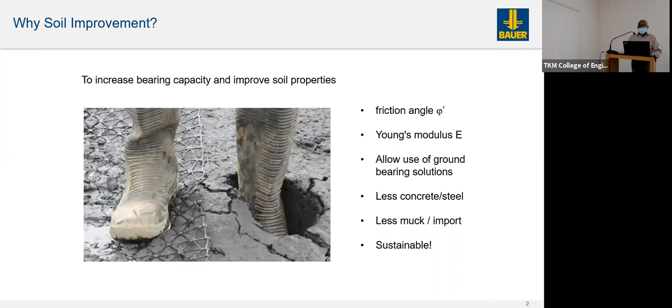Often we ignore these things while we design our structures, basically due to cost constraints. But at the end of the day, if you try to save pennies when you do a proper design, you will spend a lot of money at the end. This is what we see in a lot of projects around the globe. I have traveled in excess of 50 countries and done seminars in many places. We might think it is improved in certain parts of the world, but in most places, at the end of the day, everybody goes behind the penny, the money, which in turn increases the cost at the end of the day.

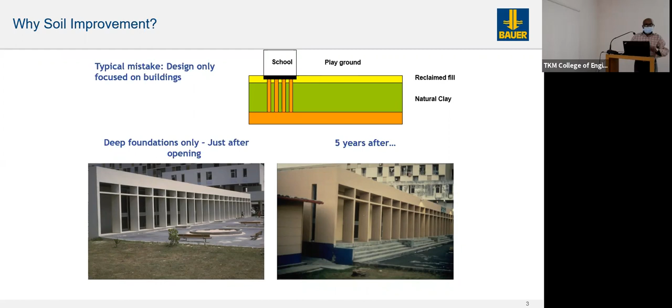I have one question. I hope everybody understands English here, and if I include Malayalam in between, you have no issues, right? I hope it is good.

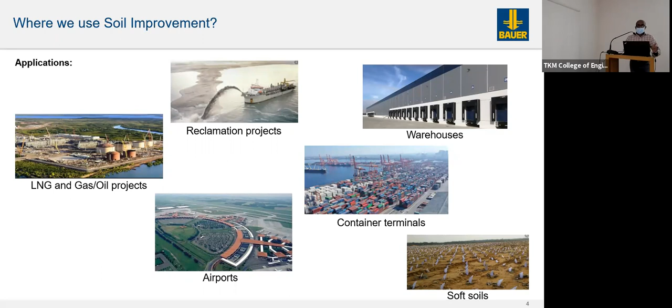Where do we use soil improvement? Basically, soil improvement is done for shallow structures, like oil and gas projects where you don't have multi-story buildings, reclamation projects where you definitely need consolidation, compaction, and improvement, warehouses which are not multi-story buildings so the bearing capacity requirement is lower than high-rise structures, container terminals where containers are put on grounds where the soil might be weak, and airports - in Dubai, Abu Dhabi Airport, I'll come to that at a later stage. Then general improvement structures, where you might not need anything specific, but you need to improve the soil because of settlement and bulkage.

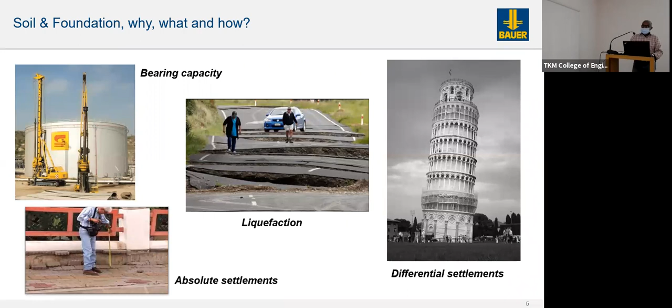On the right side, this is the famous Pisa Tower. You can see the differential settlement. I've been to this place and seen it looks exactly like this. When you're there, you're always scared to go near the building, although people go very near and inside it - it's because of the differential settlements. This has to be identified, analyzed, and designed prior to execution of a structure.

When you look into ground improvement, piling could always be a ground improvement activity. Piling also improves ground to take the bearing capacity of the loads, but that is not good enough.

Look into that left-below picture, you can see a building. The piling is perfect, but the soil was not improved, and because of negative skin friction, some portion of the pile settled, causing an overturning moment and structure failure. The right side picture also explains the negative skin friction due to no soil improvement. So piling is not always enough.

This can be mitigated another way, by increasing the load bearing capacity of the pile, considering the skin friction as well, negative skin friction as well.

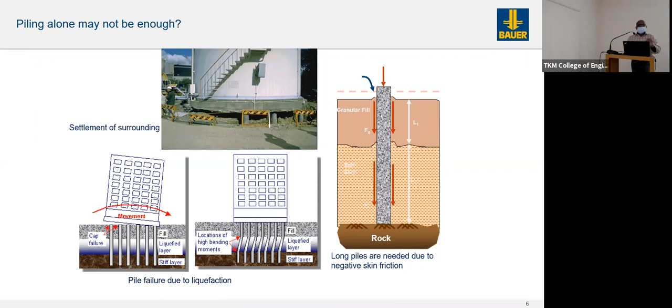Let us talk about the methods of improvement. Basically there are three methods, it all depends on the soil. Soil improvement is basically either consolidation, compaction, or reinforcement of the soil. At the end of the day, all three techniques increase the Young's modulus, the stiffness, and the angle of internal friction of the soil.

So let us look into the consolidation. I will go into detail on these techniques in later slides, but let us first look into the summary of consolidation. I believe the S7 and S8 students at least know what consolidation is.

And are there any first years here? Any S7, S8 students?

Okay, consolidation could be by itself, by self weight, or surcharge, or induced consolidation. Basically the soil by its own weight settles down, that's called consolidation. You can put surcharge and give artificial consolidation, or it can be natural as well.

Then compaction. Compaction can be either surface compaction or deep compaction. I will go into detail in my later slides. Basically all these things are based on the type of soil we are dealing with. Compaction is done using rollers, vibrators, hammers, depending on the type of compaction chosen based on the soil.

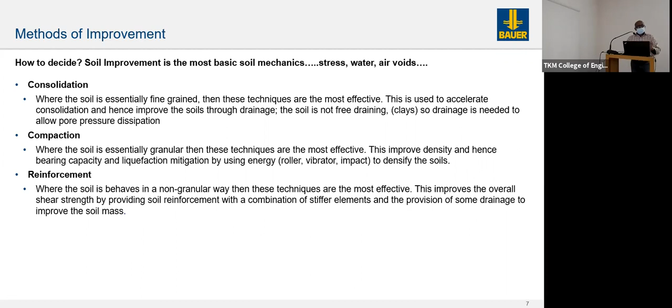There are various techniques. In today's presentation I'm not going to present all the techniques because it's endless. Even in our company we improvise with techniques sometimes, we do combinations. So let us look at the methods of improvement - basically we are going to talk today about consolidation, compaction, and reinforcement.

Okay, let's see the details of these three methods. Consolidation.

We know what a vertical drain is. Basically, stress has to be relieved from inside the structure, inside the soil, deep, either through surcharge or through self-consolidation.

PVD is called prefabricated vertical drains. You draw pipes into the soil, which creates pores and allows pore water to escape through the pores. Vacuum consolidation basically puts pressure and consolidates. Then you have a mixture of stone columns and PVDs, a mixture of many things. I've put only minimum things here.

This is consolidation. Normally in our construction, what I've seen over the past 30 years, when you backfill, we always make the backfill stay there for a couple of months - 3, 4, 6 months - so that it self-consolidates. Even in building constructions, when we do basements and backfill inside, we sometimes pour water and keep it for some time for self-consolidation. Basically this is the principle for self-consolidation.

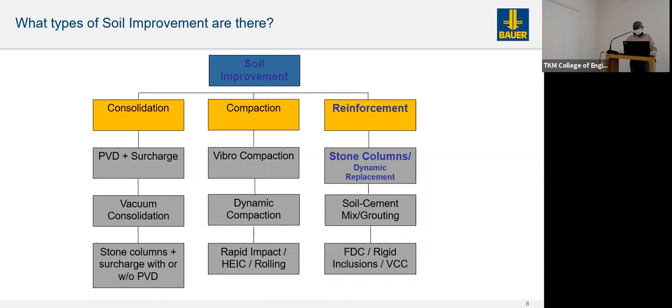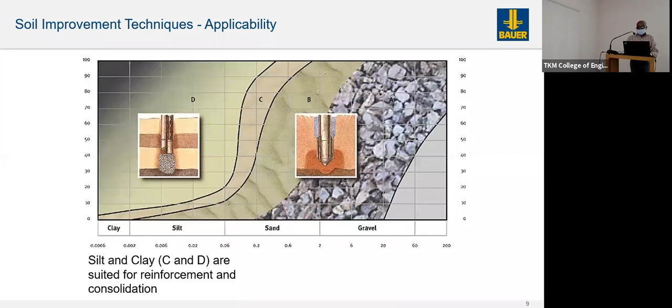Again, same thing - from right to left, the cost increases. When you look into the percentage of passing of the fines, on the right side, the percentage of fines is less. On the left side, the percentage of fines is more.

This is a bit design side, I don't want to go too much into it. It's just that zone A and zone B can be used for surface and vibro compaction. Zone C and zone D, you can go for reinforcement - basically replacing the soil or compacting with a higher stiff material.

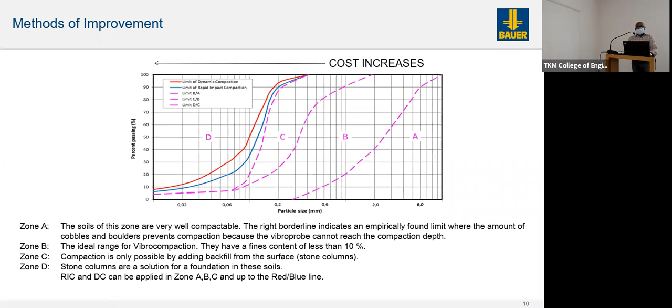Okay, when you want to do a soil improvement, first of all, you need to decide what performances are required. You have a performance specification. Any building, any design, you have a performance.

When you design a structure, you design a beam, you always find out how much is the load to be distributed on the beam, then to the column, and then down, and then to the foundation. Like that, you always look at the performance requirements.

At the end of the day, as I mentioned before, you increase the stiffness of the material. Well, how do you increase the stiffness of the material? By increasing the angle of internal friction.

So first of all, you have to find out the bearing capacity and enhance it to the required one. You find out how much is the bearing capacity of a soil at the moment and how much you have to improve based on the loads coming from the structure.

Then you have to limit the settlement. Sometimes certain soils are good enough to carry the loads coming in, but it might induce settlement on a long-term basis. In that way, you do a settlement analysis and find out what is the capacity of the current soil for taking the load and giving a settlement in the next 25 years. So you can do a 25-year analysis using different techniques in the design.

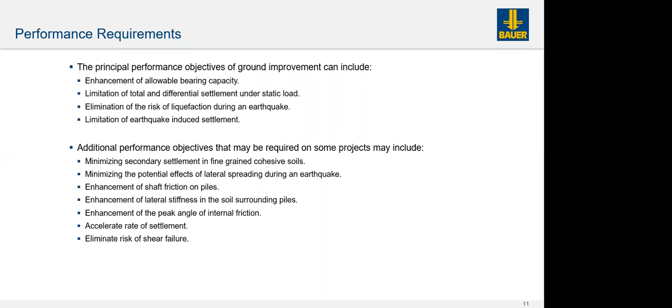So mitigating and eliminating the liquefaction potential during an earthquake is the most important thing when we design soil improvement in earthquake-prone areas. But that's not the only thing. You can consider the liquefaction potential, but you also have to limit the settlement due to earthquake. So considering all these things, you need to improve the soil.

There are additional performance requirements for certain areas of a structure - at certain corners, the load might be a bit more, so you need to improve the soil bearing capacity there.

A typical structural engineering example: you have to improve the soil in reclaimed areas, like Palm Island in Dubai - you must know Palm Island. That's a completely new island, all reclaimed. All the structures are on piles, but before piling, they performed soil improvement, only to reduce the negative skin friction of the soil.

When we looked into the analysis, we found that if you add these loads to the piles, the cost of the piles would be much more than the money spent on soil improvement. So we better do the soil improvement, which is good for the whole structure and the surroundings.

We did a complete sweep - we swept along and did the soil improvement, and then did the piles for the required areas.

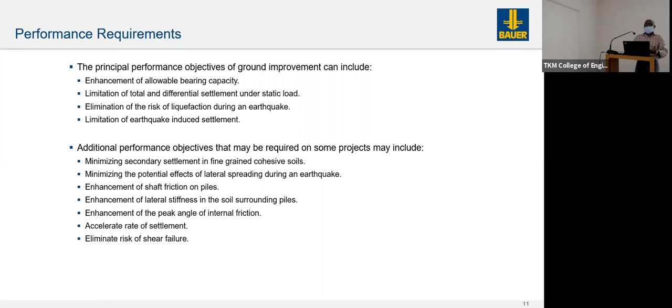Elimination of risk of shear failure - ultimately, when you improve the stiffness of the soil, the shear failure is reduced. Now, consolidation techniques. Let me go back to the slide where I mentioned the 3 important facts of soil improvement: consolidation, compaction, and reinforcement.

Let's come to the consolidation techniques. Vertical drains - I believe you know vertical drains. These are basically drain pipes pushed or drilled and installed through the soil. These pipes have slotted holes which go down and take the water or air out, because in clay structures, you know, the drainage is very little. So basically they're making a drainage layer, with intermediate layers.

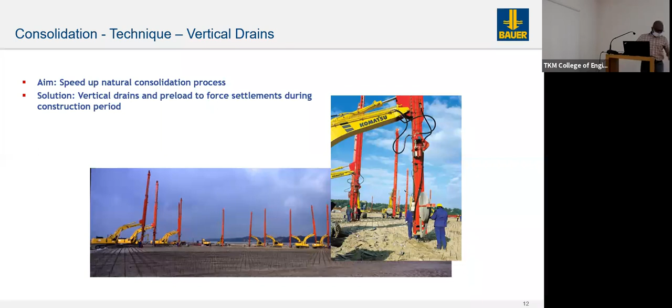If you look at the structure here, you can see the bottom layer, with a compressible layer on top which is soft, and it is drilled through, allowing the stress to reduce by taking the water or air out. That's where, when you go for natural consolidation, this comes automatically over a period of time.

Whereas these are induced vertical drains, which are very familiar in places like Jordan, Lebanon, and Iraq. Iraq is a place where vertical drains are very much required because they have a clay layer on top which disallows the water and air from coming out. So the moment you drill, you will see air and water coming out like aquifers.

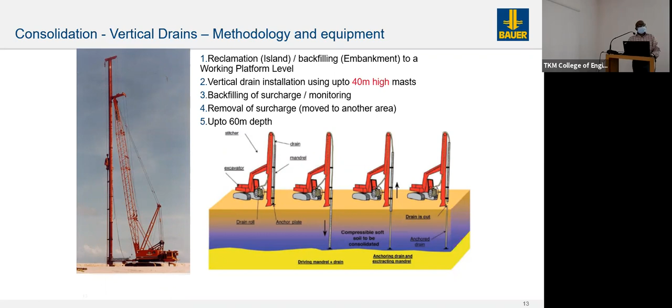I've been to Iraq and seen when they drill, the machines go down, even before giving the vertical drains. These are all prefabricated verticals. We have done up to 60 meters, we have drilled up to 60 meters and installed these drains.

This is basically the principle of this. You have a compressible layer, a compactable layer down below, basically take the drain pipes down and then release the pressure either naturally or put the surcharge. You put the pipes and fill the surcharge with this load. You basically drain the soil out, drain the water and the pressure out.

Install vertical drains, apply surcharge, allow consolidation time, remove surcharge and put the surcharge to the new place, and the method is repeated.

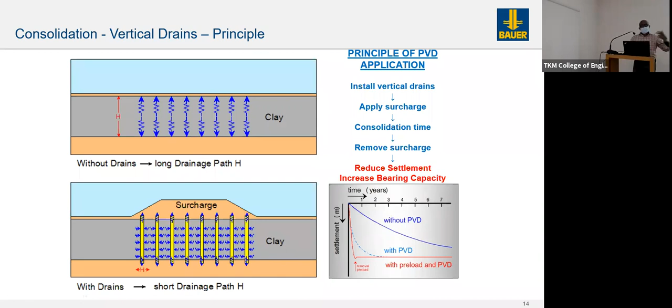The second technique then, we go for compaction. Compaction is classified into 2 types, basically surface compaction and deep compaction. For surface compaction, you have different techniques. The easiest way is the rollers, which I'm not going to talk too much about.

This is called high energy impact compaction. These are rollers. From the shape itself, you know how it is going to work. I will show a couple of videos which shows these things. Basically these are triangular, 3-sided rollers, which is being rolled, and then compaction is done automatically by driving around with this tractor.

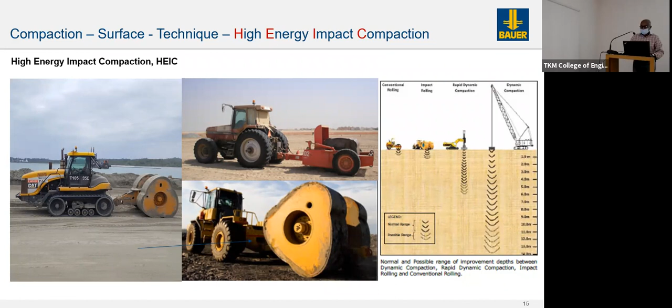This can compact up to 2.5, maximum 3 meters. These are the equipment which we fabricate, which we produce. This is where it is, you can see it. There are 3-sided and 5-sided types. The 3-sided are more powerful. You can see 25 kilojoules and 15 kilojoules. It depends on the type of soil. If you ask me which one to choose, it all depends on the type of soil.

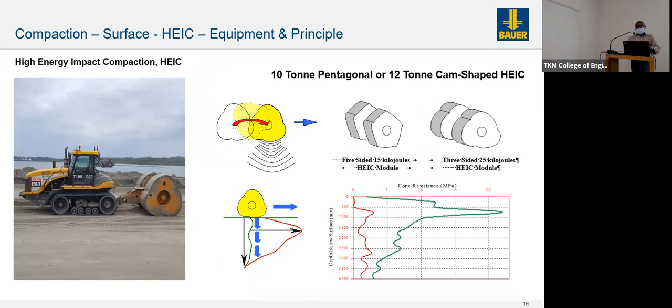Basically, they're going to impact, and the pressure is being transferred down, and over a period of many passes, many rolls, the bearing capacity is going to be increased, and you will see settlement as well. I'll show a short video of this HEIC.

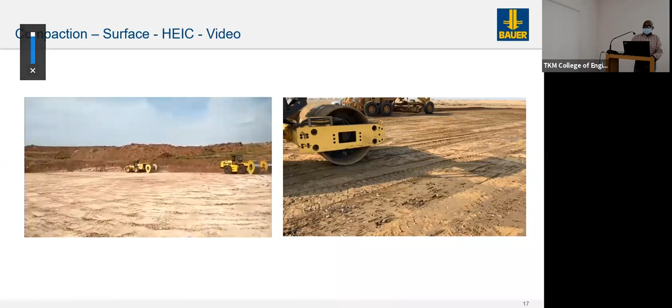Basically, it's been driven like this. So you actually design these things based on the soil, based on the contours, based on these rollers, they find out what is the thickness of the layer to be improved. Based on that, they will always design the type of pounder, the speed at which it can roll, and the number of passes.

These are all designed, it's not that you drive haphazardly. You have a series of tests to be done before and after. You do a pre-CPT before and a post-CPT cone penetration test. So this is being designed and done, this is the way it's done.

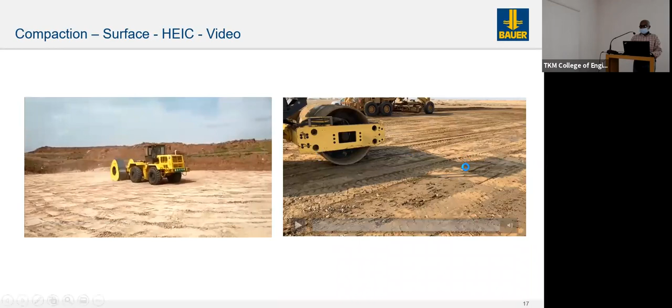After that, what they do is they do the roller on top. This is the roller compaction for the first 50 centimeters top layers. This is basically high energy impact compaction, the shallowest compaction in ground improvement, apart from the roller side. The roller is there for every type of compaction, at the end of the treatment, whatever you do, a roller compaction.

Now, the next method is called rapid impact compaction. This is basically using dynamic loads, dropping hammers fixed on a machine. These are the machines produced by us. You have different types of machines and different types of hammers as well. The middle sketch is very clear how the energy is being transferred down.

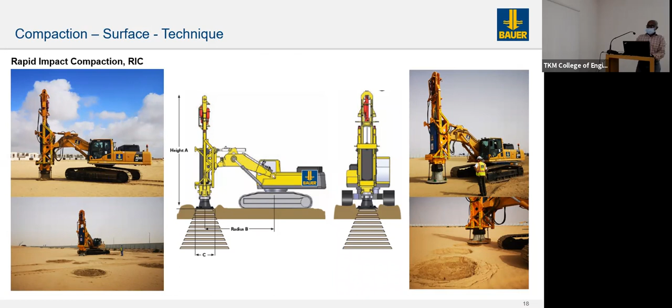So you do a series of hammering here, and you overlap based on the design. Again, it depends on what type of soil you're treating, what type of method, what type of equipment you're using, and what thickness you're treating. Just to show videos on this one, these are all amateur videos taken from outside, okay?

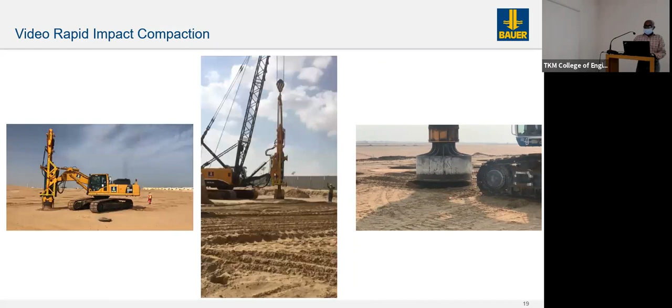Basically, what we do is drop this hammer based on the design. The number of blows has been designed, the type of hammers are designed, and we can compact up to 4 to 5 meters on normal soil. This is basically rapid impact compaction. The next one, dynamic compaction, is a bit deeper. This can go up to 9 or 10 meters; we normally do it from 5 to 10 meters.

Again, basically this is nothing but dropping of hammers. You have a crane, it's fixed to a hammer through this wire rope, and then it is being dropped.

This is an example. I switched off the audio, okay? So this is dynamic compaction, where we use the hammers.

This is also a hammer, a bigger hammer as you can see. You lift it. This height of lift is also being designed. It's free fall.

This is a hammer being designed in a different way. This is a 25-ton hammer, the weight of the hammer is 25 tons. This is something exclusively designed for a particular project, and we have designed it differently. You can see when it falls, it's different.

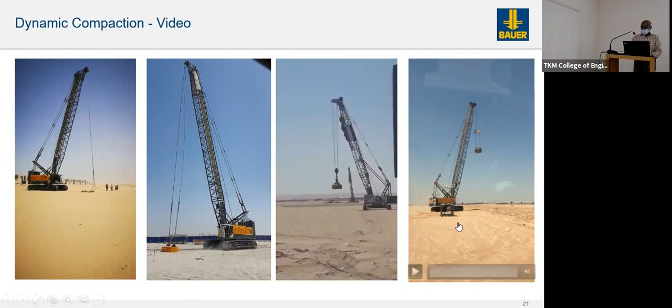So you will see a lot of craters like this, a series of craters which have to be backfilled and compacted.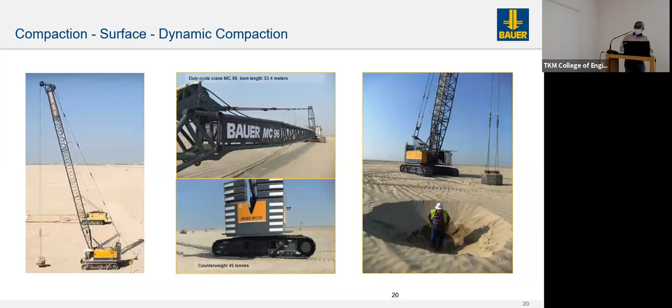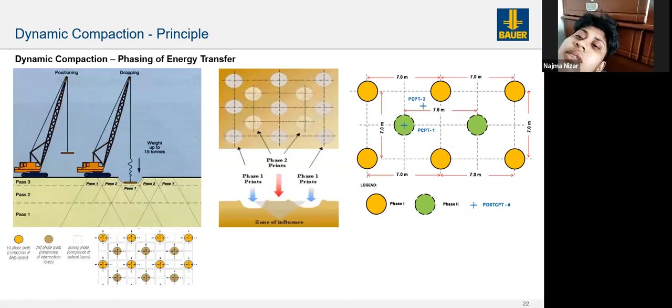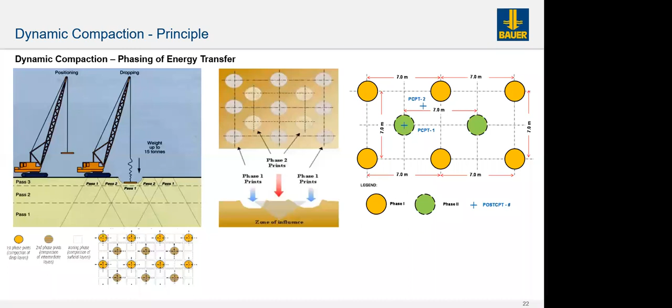The principle of dynamic compaction, you can see it from the sketch. It's being compacted in phases. Phase one, you compact with a huge hammer which will reach up.

Okay, you do a pass one with a huge hammer, and then as you go up, you reduce the size of the hammer, all based on design. Sometimes we might use the same hammer with a limited number of passes and reduced drop height. But when we go for big hammers, you need a bigger crane, and the cost is very high.

So what we always do is, when we do the first pass, we move to the next location, and a smaller machine comes in to do the other one. Or we bring the RIC machine to do the top 5 meters. So you will see overlaps here so that the whole area is compacted.

This is the way it's done. That's the second pass and third pass, and pass 3 is the surface compaction. That's surface compaction.

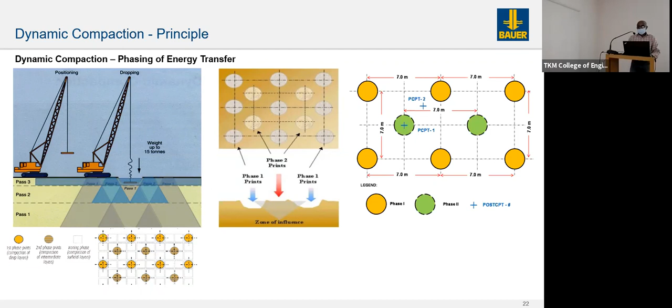Now, deep compaction. What we've spoken about now is compaction from the ground surface. Now we go to deep compaction. Let me go back again: you have surface compaction, which can be done using high energy compaction, rapid impact compaction, and dynamic compaction. High energy compaction can be done up to 2.5 to 3 meters, rapid impact compaction up to 4 to 5 meters, and dynamic compaction up to 9-10 meters. Beyond that, the energy from dropping a hammer will not be transferred further.

So what we do is go for deep compaction. Deep compaction is done using vibratory techniques. You have a vibrator which is poked into the ground and vibrates it, so it horizontally displaces the soil, and when it compacts horizontally, the ground comes down.

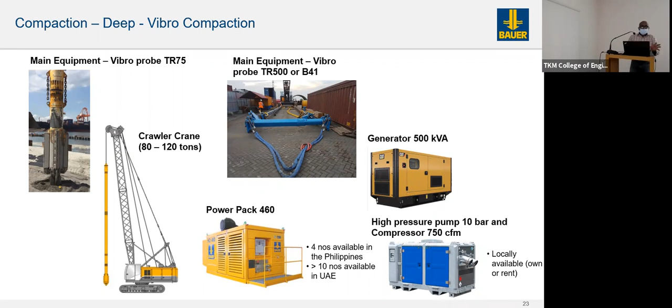The equipment used includes vibrators, cranes, then the power pack which vibrates it, generators of different types, and also pumps. What we normally do in vibro compaction is mix air and water through the nozzles of this vibrator so that it vibrates, without choking of the moving parts. Basically, this is deep compaction.

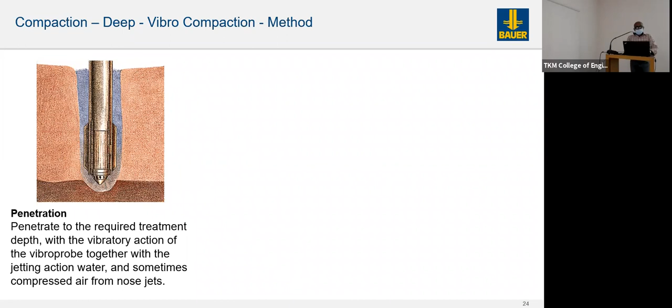The vibrator is this machine which is being driven down for penetration. It penetrates to the required depth. Then basically we install it, which means we hold it, penetrate to the maximum depth, and hold it at different steps so that the soil around is compacted.

As you compact down, you will see the ground settling. You can see even the crane used for compaction settle down sometimes 10, 15 centimeters at each location. At the end of the day, when you finish an area compacted about 15-20 meters, you normally get about 10% settlement. If you compact 20 meters, you might see 2 meters.

So for doing this, if you want a final grade level, let's say this is 0.00, you fill based on the compaction requirements - you do extra fill so that when you compact, you reach that level. This is the installation, and then this is completion of it.

You lift the compactor, it lifts the vibrator at different levels, stay there, retain it there for some time with vibration. These are all based on designs, because the design report clearly tells you how many times you have to stop in between and at what levels you have to stop. That's based on the type of soil you interfere with.

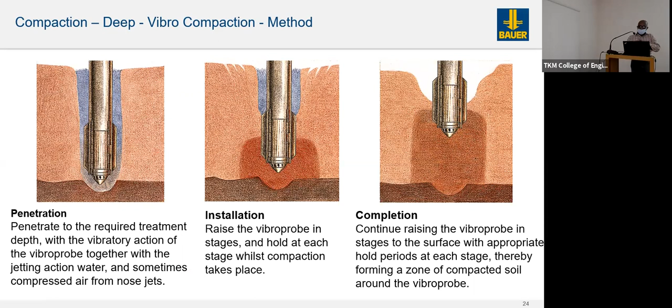Although we have all other equipment to do the works, because that might be part of this project, sometimes we do this together as well.

Okay, reinforcement. When we talk about reinforcement, it can be anything - whatever you do on the soil, it can be reinforcement. In olden days, when we backfill our basement, we use hand equipment to compact. So basically, you bring in good material to mix with the bad material and make it a better material. At the end of the day, you're increasing the stiffness modulus by increasing the Young's modulus and the angle of internal friction. Everything is E and phi, nothing else. In soil improvement, it's only E and phi dash.

The equipment used is more or less the same as that used for deep compaction. Basically you're poking it down, and those holes, when you do vibro compaction, you're not filling it. Whereas in this one, we fill it with inclusions - either cement, concrete, sand, whatever it is.

There is one more method not specified here in reinforcement, called dynamic replacement. Dynamic replacement - I explained about dynamic compaction dropping hammers. So what we normally do is, if you have 9 drops to be done, after the 5 drops we'll be filling rock into this. So we push the rock into the sand - it's a combination of stone column, a little bit cheaper. We do many methods in between - there are many combinations of these things.

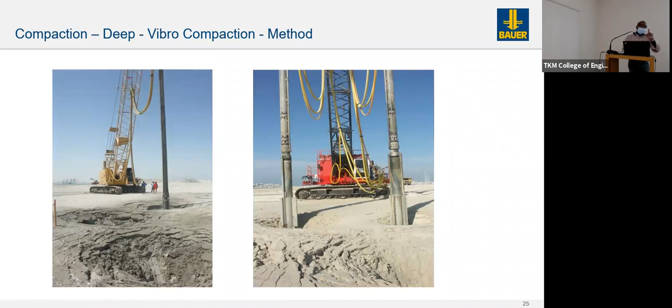There are 2 types of stone columns. Let us talk about stone columns. Using this equipment, you put the vibrator down and then fill with rock. Same equipment, but the rock can be filled in different ways.

The first one is called dry bottom feed. In some places, some clients, especially underwater, you don't want to put the rock onto the seabed. When we go to the seabed, you have to improve it - how do you improve the seabed? You pull the poker down. If you put the rock from a barge, it will spread, and you're not sure all the rock is going into the holes.

So what we've done is something called dry bottom feed. Bottom feed means there's a tube going through the center of the vibrohammer. We feed rock from top, it goes down, the valve is closed as you go down. Once it reaches the required depth, we fill rock through the hoppers, it goes down through the stem of the auger, the valve opens, and slowly we pull the vibrohammer up.

The normal method is wet top feed. This is going to be used in very wet areas as top feed. You put the vibrohammer down and feed with wheel loaders or shovels, putting rock inside to go into the craters.

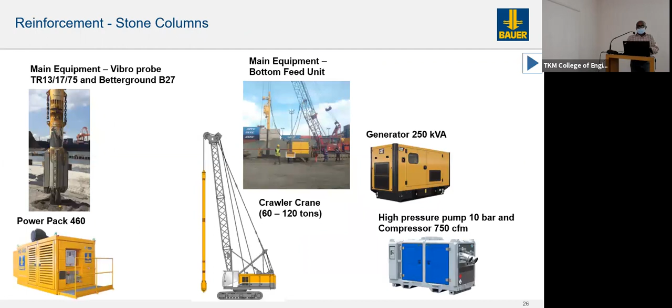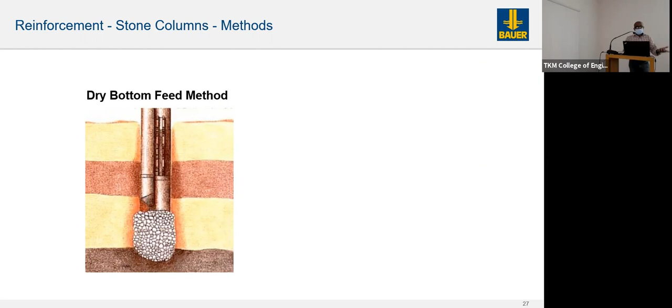So when you talk about stone columns using vibrohammer, dry bottom feed is predominantly used in underwater structures. In some areas we don't want to disturb the topsoil, so they do dry bottom, but this has limitations in depth, because if it goes beyond 10-12 meters, you have an issue with the equipment. You need huge equipment, which is going to be expensive. So 90% of stone columns are done using wet top feed.

This is the method of installation: penetration, installation of stones, completion. On the right picture bottom, you can see a bulge. That's the type of soil - in that area the soil is more compressible, and hence the stone size has gone up. So with stone columns, you might not get a pillar type structure. Depending on the type of soil, the stone will go laterally.

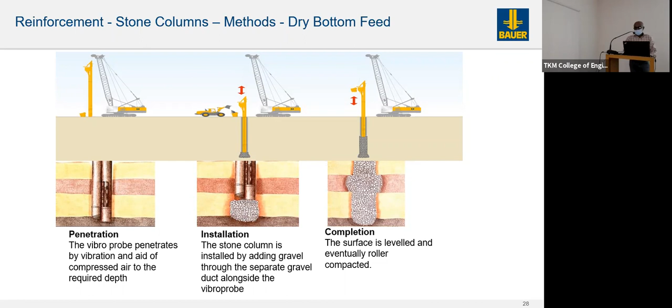This is the bottom feed method. You have a hopper on top, fixed on the top of it. You fill it with stones, take the hopper up, and then through the stem of the auger it goes down to the bottom level, and then it's being lifted.

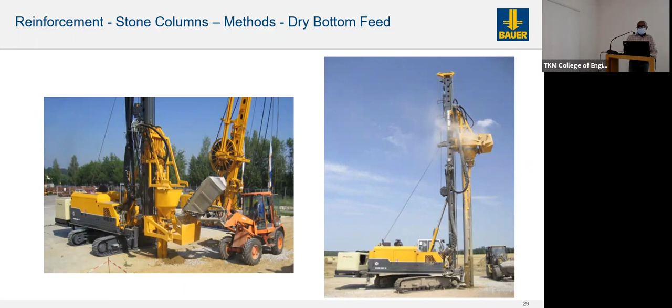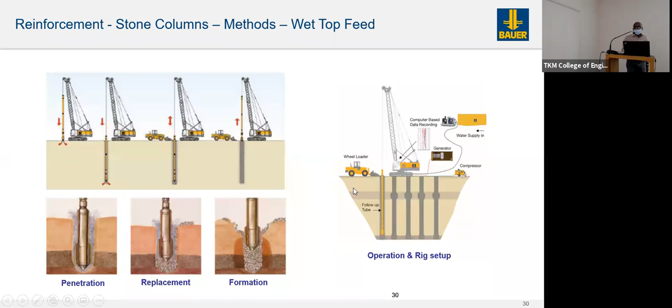Next is the reinforcement method of rigid inclusions. As I told before in my initial talk, a pile can be a rigid inclusion, and at the same time it's taking a vertical load as well. These stone columns can take vertical loads too. The only difference is piles can also take tension loads, whereas stone columns cannot take tension loads.

That's why when you design warehouses, low-rise structures, tanks and foundations, you will see stone columns, whereas for high-rise structures, when you have bending moment and tension load on the piles, you go for deep piles with reinforcement.

This is called full displacement piles. These are different types of augers where the auger displaces the soil as you drill in. The auger displaces the soil sidewise and then pumps concrete onto it. There is another method called CFA, continuous flight auger, which I have not mentioned here. There are multiple items - when we look into our product profile we have so many, so I only took the most common ones because it's an ocean of equipment and types.

This basically displaces the soil - you can see the arrows where it's displaced. At the end of drilling, you pump concrete and withdraw the auger, thereby increasing the stiffness of the soil. You don't see any spoil coming out - nothing will come. In stone columns, you see bad soils come out, especially silty soil when you put rock inside. Whereas in this method nothing comes out; the ground will be clear.

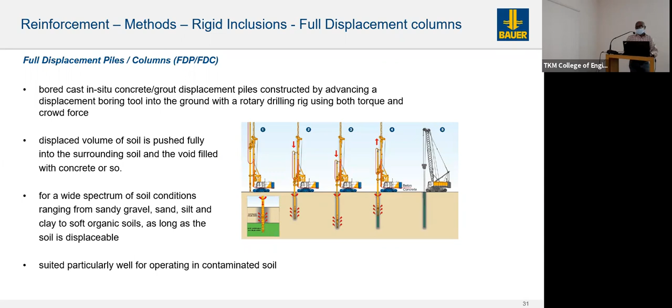This is called mix in place wall, or MIP. You have single auger and multiple auger. This is a patented product by Bauer.

You have multiple augers on a drilling head. This mixes the soil itself, you add cement to it, and you mix the soil to increase the stiffness around. It's called mixed in place. We do it mostly for cut off walls, where you don't want soil ingression or water ingression to the other place. Especially in contaminated places where the contamination should not spread to the adjacent place.

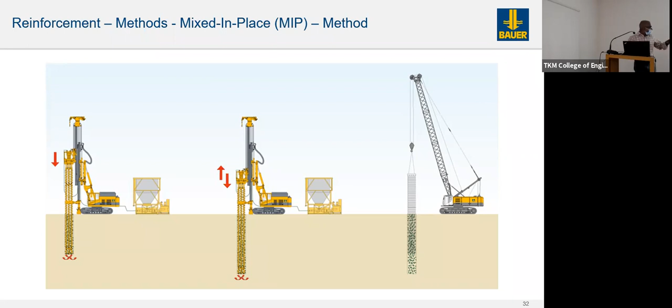This is called mixing, a kind of soil improvement. You have single auger and multiple auger, meaning up to 3 augers, not more. These augers rotate counterclockwise so that it mixes the soil. This can sometimes be reinforced also, you can see a reinforcement coming into it. I've given an example where in some areas you mix it, create a grout column or grout structure, and push the reinforcement into it.

Let me come to the summary. Soil improvement, as I've told before, is consolidation, compaction, and reinforcement. For consolidation, we have explained many techniques: surcharge, induced surcharge, natural surcharge, and sometimes a combination with stone columns or vibro compaction. Vibro compaction is mostly used, especially along with drainage. When you vibrate and have drainage, the soil compacts very quickly.

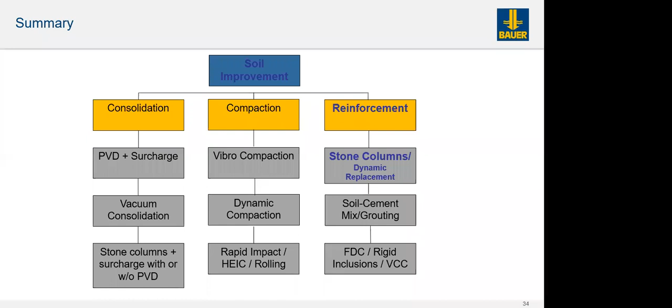Then you have compaction, which includes surface compaction and deep compaction. In surface compaction you have rollers, then high energy impact compaction, then rapid impact compaction, and then dynamic compaction. This goes from surface compaction at 0 to 1 meter, rapid impact compaction 1 to 3 meters, HEIC or high energy impact compaction 3 to 5 meters, and beyond that, 5 to 10 meters is done using dynamic compaction.

If you ask me, can't you do stone columns for these? Yes, you can, it all depends on the soil. In some areas you can't do surface compaction, so you have to go for replacement. This is basically used in areas where you can't do compaction. So these are the methods for compaction.

Then comes reinforcement, which is a vast topic. I have presented only the most common methods here: stone columns, dynamic replacement, full displacement piles, and vibro concrete columns. As I mentioned before, the most expensive method of treatment is definitely reinforcement, because you have to bring in external materials, whereas the other methods for compaction and consolidation don't need external materials.

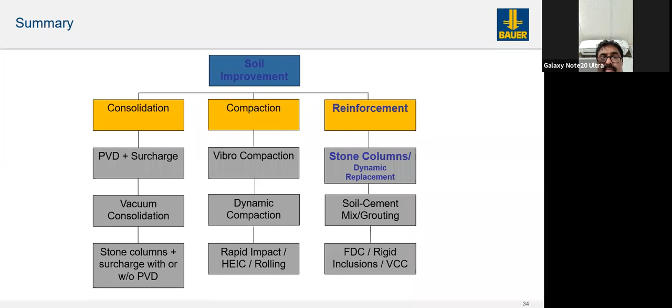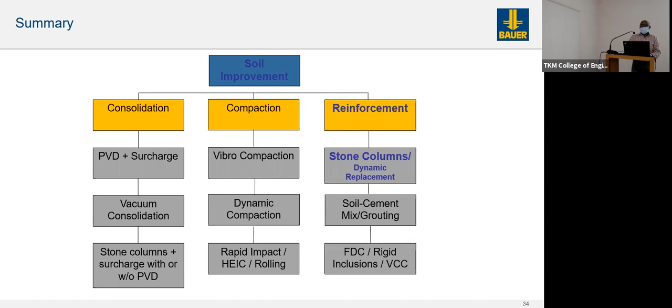Even the surcharge used for consolidation can be reused, since surcharge is basically just putting additional pressure, nothing else. So that's basically the end of my presentation, and it's open for discussion and Q&A. I think I'm on time. Any questions you can ask, I can also give my email address if needed, though I forgot to put it here. Now the session is open for discussion.